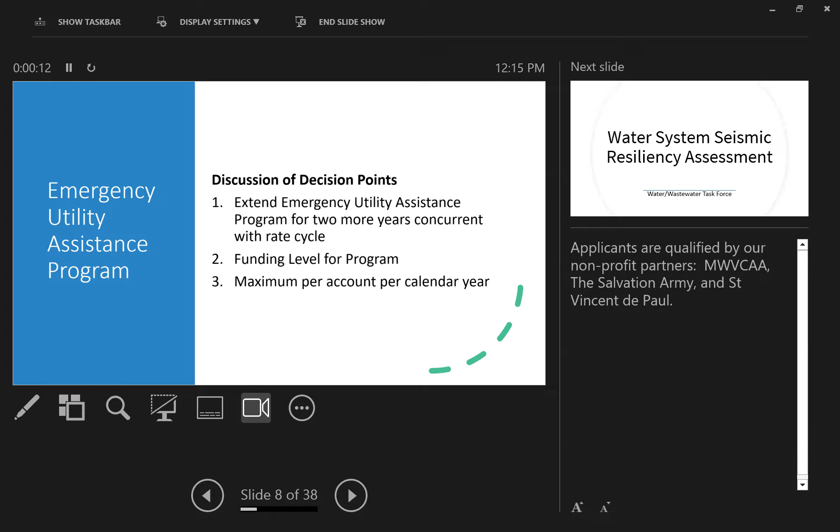So could you quickly summarize the revenues again for this? There's nothing except utility at this point. There's a small amount of federal revenue, a small amount of donation, less than $10,000 per year.

I'll note that there's a note on one of the slides that it's 1% of utility revenue. So when we increase and say our revenue slope is 3% or 4%, the difference between 3% and 4% is about $1.1 million. So when you're talking about subsidizing at $300,000, we're talking about a third of that.

So order of magnitude, and this may be something you want to sit with for a minute. I didn't want to push you to make a decision immediately. If we've got a lot of other things to get through, I thought we could circle back at the end if you want, if you're ready to talk about it more.

One thing Alicia and I talked about is there's the utility rate relief, which is applied monthly for people who are income challenged. Emergency relief was really meant for emergency situations, not something to rely on every year. So another thing we could look at is maybe we limit it to no more than 2 years, or one time every 3 years or something. It kind of feels like as usage has gone up, people are just depending on it and using it every year versus it being for an emergency situation.

How do you define an emergency? Is it a personal decision on the part of the applicant, or do they go to the Salvation Army or St. Vincent de Paul and say my husband wrecked into a truck before I came forward, and I can't pay my bill this month, and I need my water on? But it's not a program-defined emergency. Right, that's the intention.

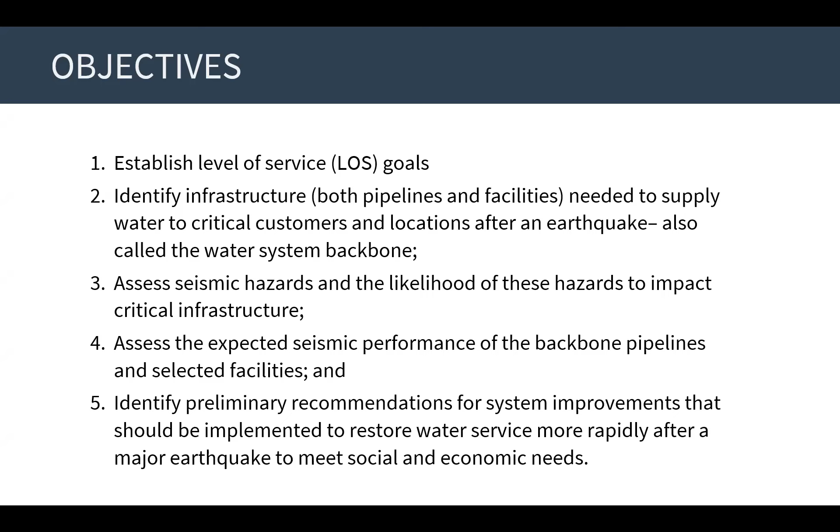But the good thing about that is, that's 0 to 1 days, right? So we're set up in a great environment at our treatment plant that it's pretty seismically resilient, just because of the geology around it, right? So we think that within a couple of days after the big one, we could actually start moving water again.

Should be able to have water. What's that? If you have water. If the dam, well, yeah, assuming the dam's still there, right? We're not gonna get into that today.

So we look at, can we get it out of the system? Can we get it out of the treatment plant? Can we get it through the system? And then how can we get it out to the community? And the good part of this is that everything here is in the short term, 2 to 4 weeks. We feel confident that we can be back up and running in 2 to 4 weeks, not fully functional, but getting to those critical places that we need to.

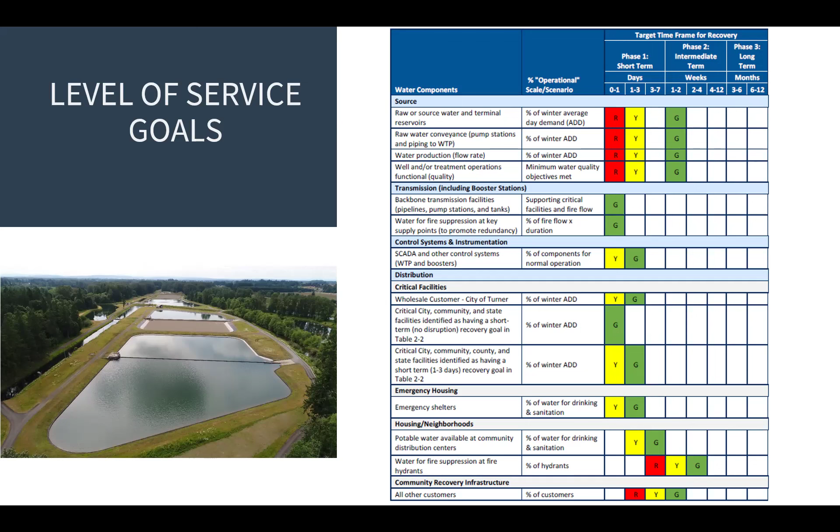Go ahead. We took all of our facilities, and there's a lot of them, and we ranked them as, what is the most critical, right? Highly critical, Geren Island water treatment facility. Turner Control in Turner, where all the water passes through.

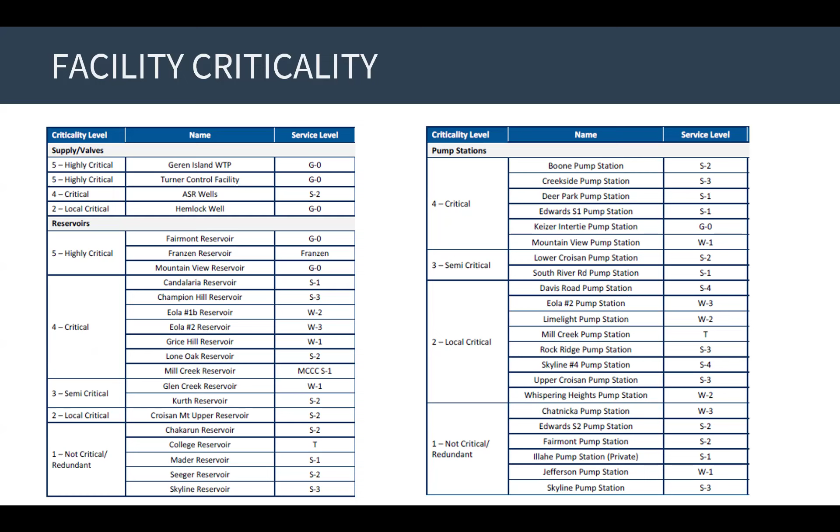And then we go down the list. Critical, this one, local critical is a term that we use for a small pump station that serves - if that pump station wasn't running, then that little neighborhood would be out of water, right? So that's what we call local critical. And we get all the way down to non-critical, and we do have some redundancy. So things like College Reservoir, Mader Reservoirs - if they were offline, they're not going to really cause us too many problems.

Can you describe the number of households served by those various reservoirs? Like when I see the one up on Croisan Mountain, it's not very big. That would be your local critical designation, meaning if that one is out of service, it will directly affect the residents in that area, but it doesn't harm the greater population.

When we say highly critical, we're talking about Fairmont, Mountain View, and West Salem, right out of downtown. Those are terminal reservoirs for us - that's where everything goes and gets distributed. But when you talk about those local pump stations or local reservoirs, like the one on Croisan Mountain, I'm sure there's several in West Salem too.

You've got to get water to them - that's part of the criticality. The ones like Croisan Mountain have to come through Fairmont. The ones up in West Salem, the higher ones, have to go through Mountain View. So if we establish that beachhead at those reservoirs, we can work to repair everything going up to those other reservoirs. Having those in place and intact after an earthquake will allow us the opportunity to move up into our service levels and get services restored.

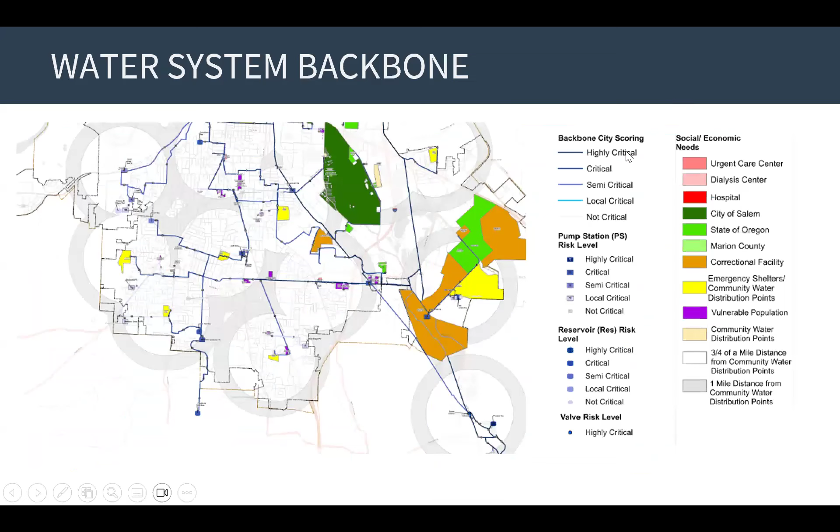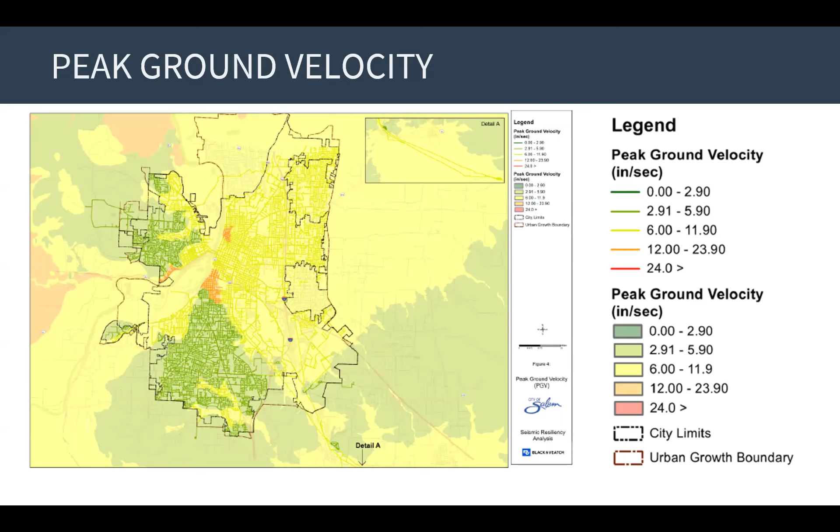These are just some of the analysis that we use - this is peak ground velocity, how much it shakes. The green is good, but that's still 2.9 inches per second. Hills in South Salem, West Salem are very stable. The downtown core and Northeast Salem are going to see a lot of ground shaking. If you go to the next one, you'll see the liquefaction as well - you shake soil enough, it becomes very unstable.

This is our transmission - so as old as this is, the good thing we have going for us is it's very stable ground.

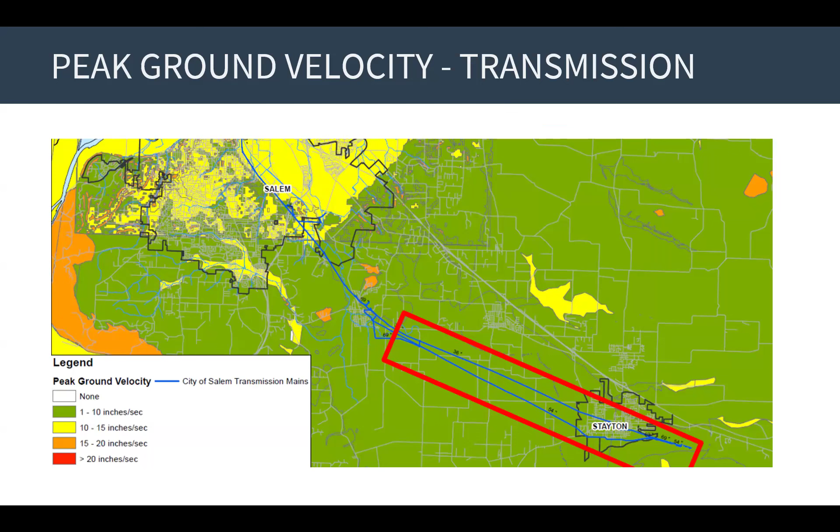This is farmland out toward Stayton. It's very stable, but that doesn't mean the pipe doesn't have problems. Go ahead, like liquefaction - this is our liquefaction map.

Is that where they're leaking right now the most? I know you're losing water from your system. We are, but we don't have that much of a leakage problem in our core. These pipes are old and need to be replaced, but our leakage rate is really mainly tied to our transmission system. We do a really good job of finding and repairing leaks within our system, but the transmission lines are very large, very long, so that's a much bigger task.

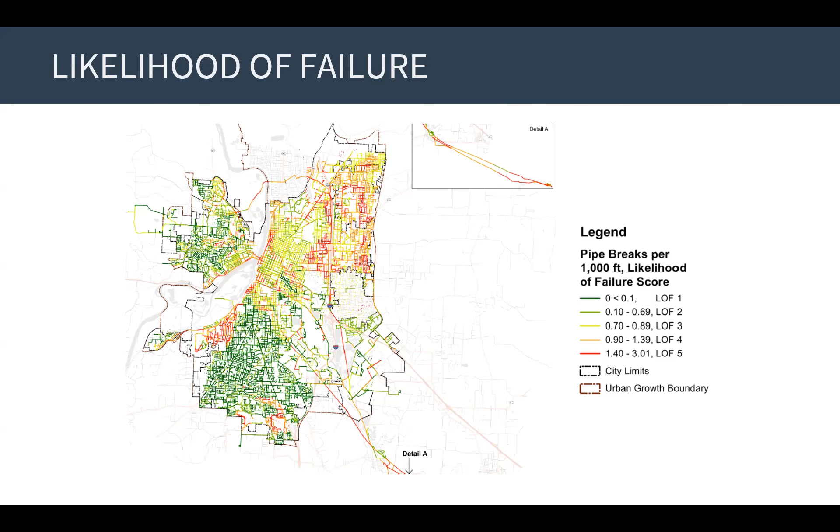So from that analysis - and I didn't take you through all of it, luckily - we developed a CIP list. What do we need to do in the short term? Short is 0 to 10 years. In the planning world, that's very short - I can tell Brian about a project, and if it gets built before I retire, I feel like that's an accomplishment. Medium is 10 to 25 years, and then longer term - what are we going to do for the long term?

So we looked at those critical facilities - what's the likelihood of failure, what's the risk if they fail? Number one, Fairmount, and Alan will touch on this later - that's our biggest need right now, besides our transmission lines. We have to shore up Fairmount Reservoir; it's a critical piece of infrastructure for the water system, everything drives off of Fairmount. Mountain View Reservoir in West Salem is the other most critical one - high need, we've got to take care of those two. The other ones - ASRs, pump stations, Turner Control - those are the things we really have to focus on in the very short term and make sure we're prepared for what comes next.

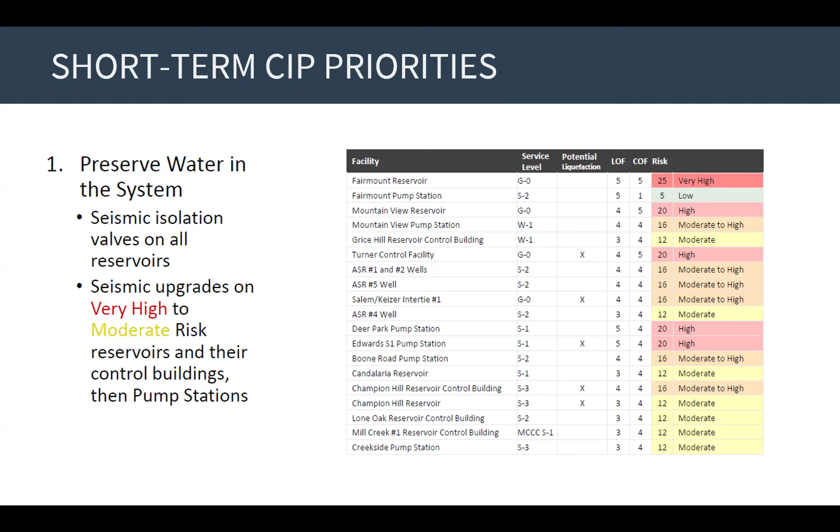Center Street Bridge project - you're probably all aware of that. We're working with ODOT to hopefully make that Center Street Bridge seismically resilient, and we're hanging a bigger pipeline underneath it to try to address some of these needs.

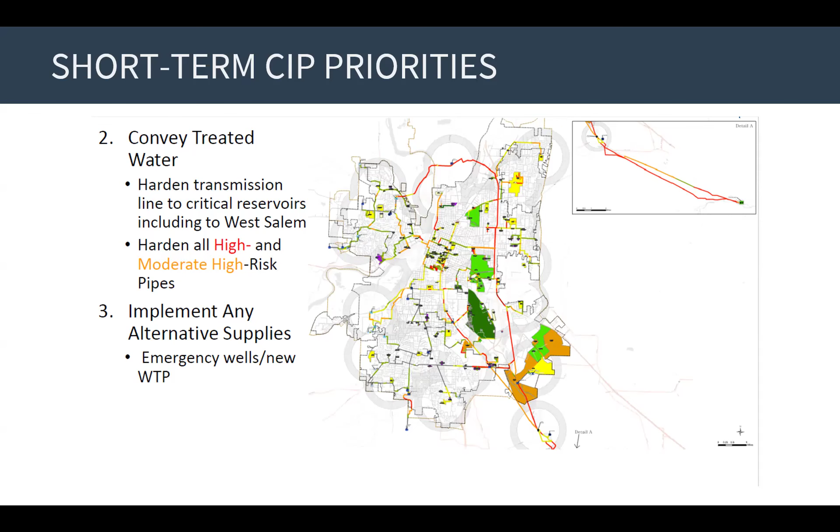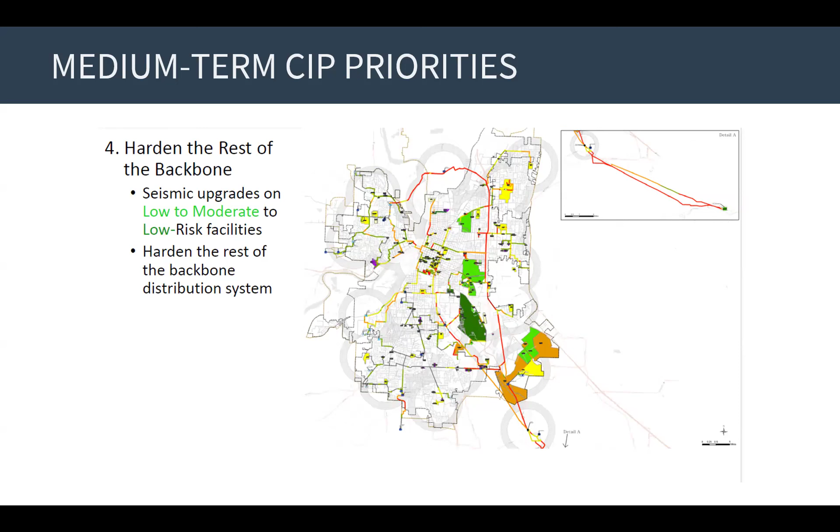Go ahead - low to moderate risk. Now we're talking about local critical small service area reservoirs that we can eventually do some things for. And then this is again the backbone - trying not to pay attention to the reds and yellows, the greens are the medium-term priorities that we're going to hopefully address in the near future.

And then that's the low risk. Low risk doesn't mean it's not going to fail - low risk here means they're not something we need to address because we're looking at our backbone. These are all in the core, the Northeast Salem area we've talked about - the ones we know are going to fail, but we have a contingency plan.

We know how to get water to these people, at least from a distribution point where they can rally to. But when we start talking about our repair and replacement program, our R&R program, you see a lot of these pipes, and we were working on these constantly. With the budget that we have, we're constantly replacing these pipes.

We know we have a critical issue in the downtown core. We have pipelines that are 100 years old that we are aware of. But again, when you look at it from a risk standpoint, how do we get water to people after a big earthquake event? That's why it's low risk.

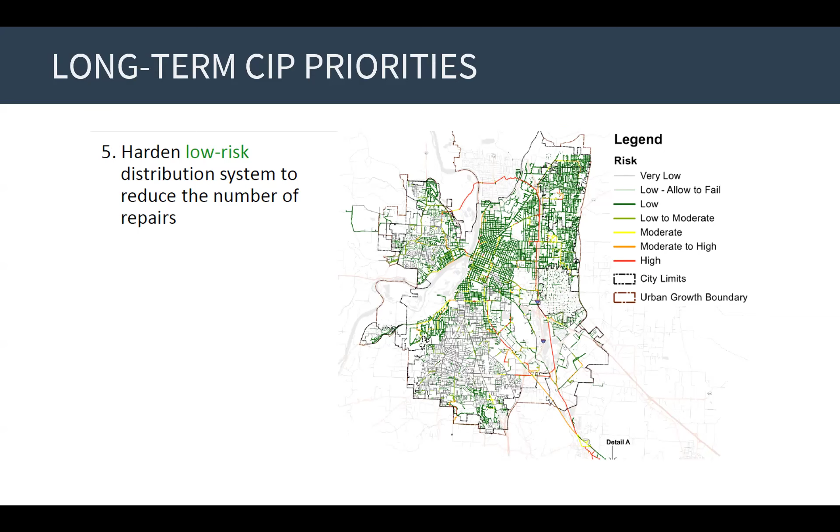They're going to fail, but it's low risk to the community at large. All right, so don't get too excited about this. This is a really low number, only $15 million. But this is based on these known issues.

So we had structural engineers go out to our facilities with their eyeballs only. We're not taking core samples, we're not checking rebar. They're just looking at things like roof joists - are things secured to the ground? Are things going to topple over when they start shaking? So this $15 million is not to be misconstrued.

I mean, this is like the things that we can easily go out and fix today. We haven't done any additional studies, right? So if you start going out to some of these reservoirs and doing in-depth structural analysis, you're going to find a lot more problems.

But what we know, what we can see with our eyes today, is $15 million. Go to the next one - $16.9 million. Again, if we had the money to just go out and start bolting things to the ground, shoring up some of the things that we know about, that's the number. But that doesn't even cover some really big needs - Fairmount Reservoir, it could cost that just to fix Fairmount.

So I always like to leave everybody gasping. Okay, so the next one, this is where we get good - $2.8 billion, there we go, to replace our pipelines.

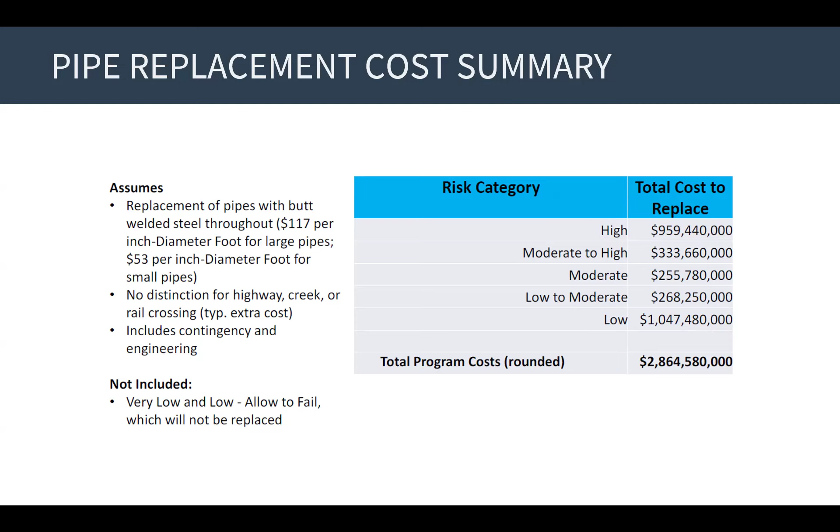That's all I have for you, unless you have any questions.

And I would just share, I think the good news on that smaller number is there are things we can go out and do for lower money that will help stabilize our system. And I think that's the key point - we've identified some really critical deficiencies in our system. And I know $15 million is a lot, but when you spread that out over 20 plus facilities, those are things that we can do right away.

So we're taking this list, we're plugging it into our ongoing CIP. Some of these are so small, they're operational projects - somebody going out and strapping some things against the wall or bolting down a transformer, things like that. There are some other ones that are a little more in depth, like reinforcing roof trusses and making sure those facilities are still standing at the end.

To what extent are those kind of eyeball estimates? What confidence do you have that they would actually provide a significant benefit, without the analysis?

So if we dove deeper into this, you would see we've ranked them on how fast - the level of occupancy, right? A lot of what we're trying to do for some of those critical facilities is making sure that we can get into the building, and that's the type of estimates we're looking at. It's not 'is the pump falling over', it's 'can you get in there and actually start working on repairing it'.

Yeah, so we did look at that. So we've got these wells. We looked at areas where you could possibly put emergency wells, and where it would be most stable and where it could supply water to that backbone.

I know Keizer has wells too. Yes, they do. Yeah, and we have an intertie with Keizer.

But we're looking at where could the city develop some emergency supplies. Our idea is not to pull these into our water system, it's like, can we put them in a school park? Use it for irrigation, but in the event of an earthquake and a distribution disruption, then that's a place you could rally to fill your water jugs up. So that is definitely something that we looked at and we have in our plans.

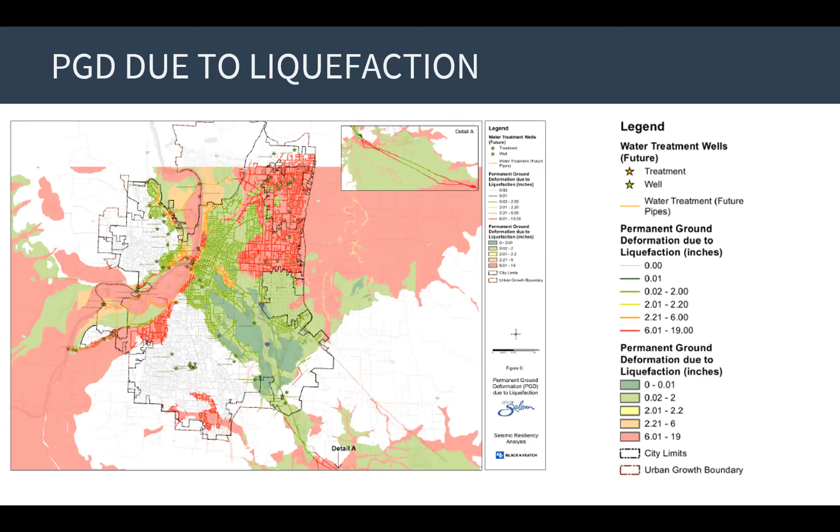I don't want to cut you short, but- I know, think we Alan's got to go. Yeah, Alan's got one more for future capital needs.

Seismic is just one issue that's facing our utilities, right? So thanks all for having me here today. Two objectives: one is just to give you a quick overview of what's in the 5-year capital improvement plan for our utilities, and then talk a little bit about what's not included in that plan as far as future needs, in addition to the wonderful news that Jason just brought.

Starting with the current capital improvement plan that was just approved last month, I've provided a summary of what's in it as far as utilities go. Every year we put together a 5-year programming summary of how we intend to budget funds for all city capital projects. The utilities make up about 40% of that total number. There are 64 utility projects in the document, amounting to just short of $200 million.

The funding sources are primarily utility rates, but we do get some system development charges to deal with those growth related expenses we were talking about earlier, and we apply for grants where we can. One good example of that is the Bennett Dam complex.

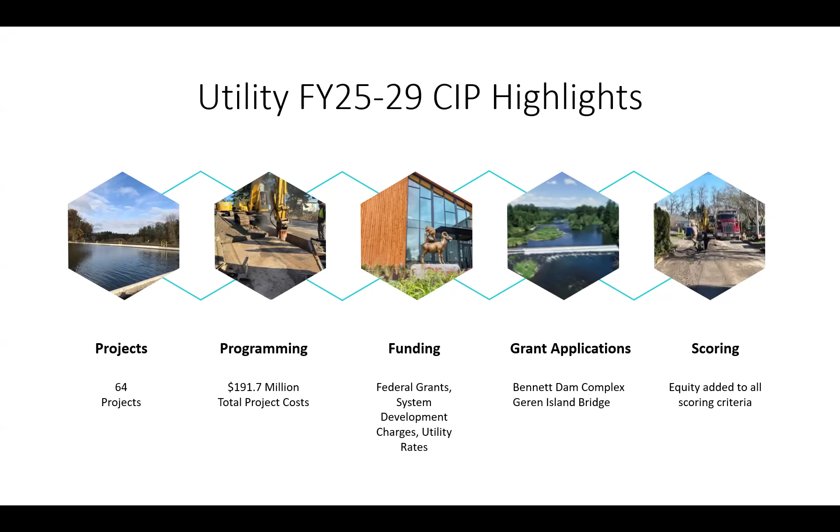So what I wanted to do is for each utility, just highlight a few things in terms of either important projects or just give you a flavor of the types of projects that are in the CIP. So starting with stormwater.

We have several culvert replacement projects in the program. We have a project in South Salem off of Mountain View Drive where we're trying to solve a flooding issue in that neighborhood. We actually purchased a property where we can create some flood storage there. It was a home that was continually being damaged with floods, so it made sense just to buy the home and create the long-term solution. That construction is starting this summer.

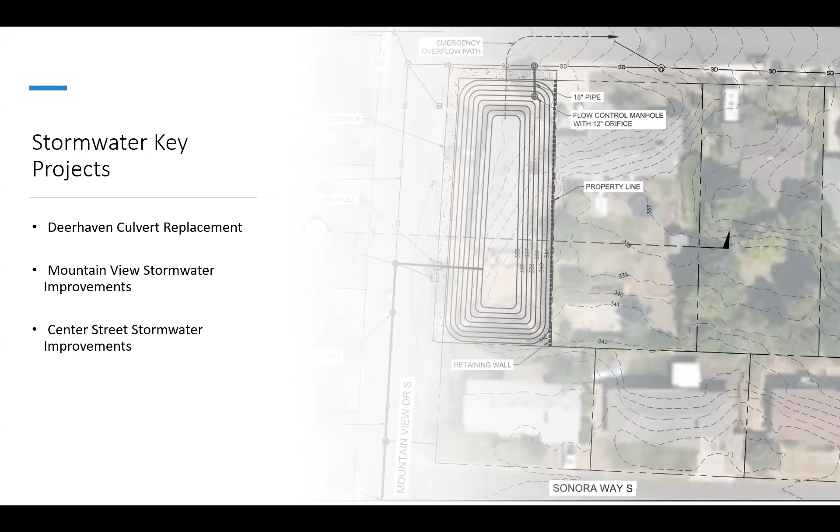Another example of the types of projects in all utilities: with the $300 million safety and livability bond that passed back in '22, we have a number of street projects where we're doing pavement work. We took a look at all the utilities under those streets to make sure to prioritize repairs that might be needed there, so we don't pave and then within a couple of years have to come back and tear up that brand new beautiful pavement. So Center Street is scheduled for pavement work in 2028, and we've got accompanying stormwater improvements to go with that. There are a number of those types of projects throughout the program in all three utilities.

Go ahead. Wastewater, there's kind of two pieces to the puzzle. Our Willow Lake Treatment Facility has a lot of aging infrastructure. We've been doing a lot of work out there, and there's lots more to do. So we've got a number of improvements continuing through the 5-year program at Willow Lake, including work on the clarifiers and digesters, both part of the treatment process out there.

Orland Road is another utility avoidance project for the bond program. The city has a construction and demolition landfill at the airport that we're not using anymore—that's where we used to empty vactor trucks and things like that in the old days—and we need to close that per DEQ requirements. So that's a responsibility the utility has to take care of.

Another issue you hear talked about with our sewer or wastewater system is overflows during heavy rain events. Because of the age of our pipes, just like our water system, they're leaky. With big rain events, we see huge surges in the system heading toward the treatment plant, and sometimes it's so much that we have overflow. That's what SSO means on that last project—sanitary sewer overflow. So we have projects identified to find areas with constrictions or big inflow sources and try to reduce those to prevent it from happening.

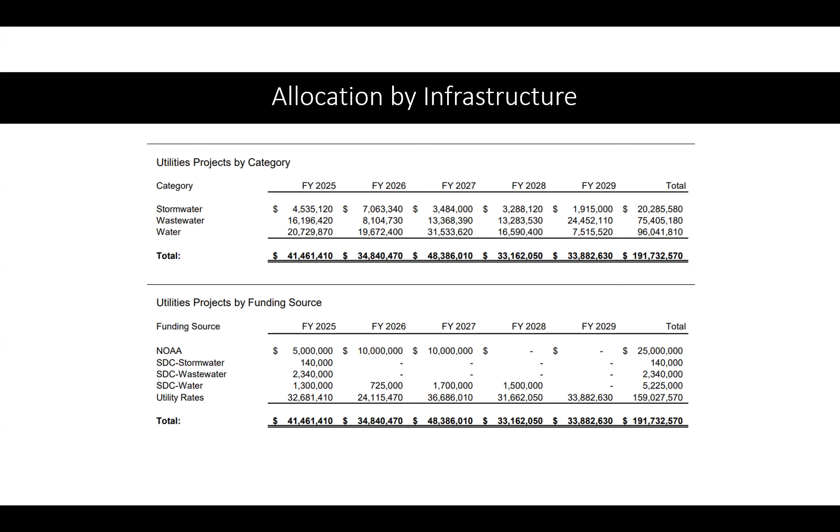So that's kind of a quick overview of what's in the CIP. But what's not in there is there's lots more. I'm sure one of the questions in your mind would be, well, how much does all this stuff cost? And the answer is it depends, because you got to look into it more.

We're talking about hundreds of millions of dollars in needs here, just in this next bullet. So we talked about Franzen Reservoir, that's our main storage before water comes to town. Between Stayton and Turner, where Franzen is, that's our main storage before it gets distributed to town. It has a floating cover that's over 20 years old and nearing the end of its useful life, so we know there's a replacement coming there. We think that's probably about $25 million minimum.

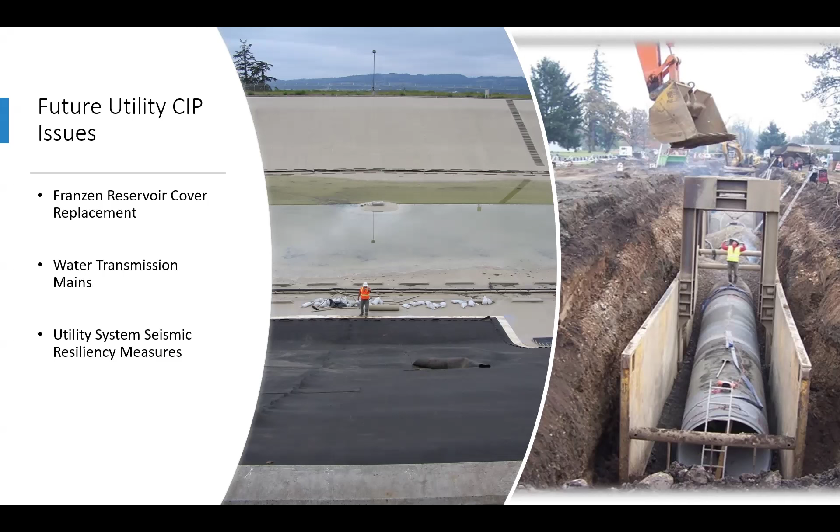We talked about the transmission mains. Those pipes were built in the 30s and the 50s, and there's multiple miles of them. So we know that's an issue that needs to get worked on, especially for seismic resiliency. And then all the other things Jason talked about, Fairmount Reservoir is the only one of those things on that list that's currently in the CIP, right?

We also talked about rehabilitation and replacement, so pipeline work, both water and wastewater and stormwater, all three. Right now in the program, we have anywhere from $500,000 to $1.5 million per year for each one of those utilities to go out and do pipe repairs or replacements where it's needed. We could easily be doing 10 or 20 times that amount if we have the money and the resources to deliver it. So that's where the needs are. Some of the work we're doing with our asset management, CityWorks implementation, will help us really refine the reporting on the conditions of our pipe and what's needed.

But we know it's many millions more than what we're funding right now. On the wastewater side, all of West Salem depends on a pump station that collects everything that comes from West Salem and then pumps it under the Willamette to Willow Lake. That infrastructure is aging and needs work as well. And then thinking about Willow Lake some more, we know there's requirements coming both for temperature, total maximum daily load in the Willamette, and an update of their permit to discharge to the Willamette. So there's going to be additional ratcheting down of what we're allowed to discharge. That's going to likely result in costs for us at the treatment plant that we don't have a number for right now, but we know what we need.

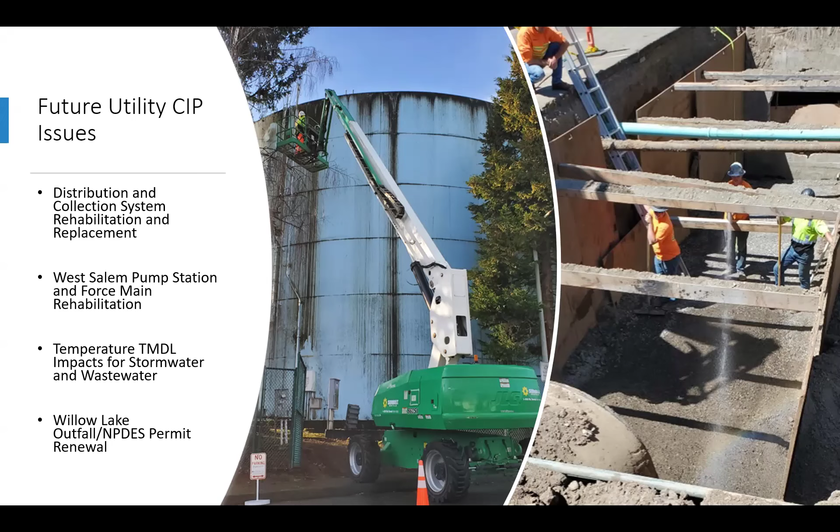Those are the main things I wanted to share. There's probably more, but these are some of the big ticket items that we're tracking that we know we'll have to define and start working into the CIP in the near future.

What do you anticipate the time frame on the TMDL limits? I think it's probably in the next few years, it's kind of pushed out. Yeah, I know they've been kind of dragging. Yes, just an update on that. I want to call out that this morning the Rules Advisory Committee had their meeting this month, and we expect the TMDL to be released probably in the near future. Is that still for comment though, or is it final? That'll be for comment, but it'll be their final version. So we are monitoring that very closely, because as proposed right now, it's causing us issues around the first year, and that'll only get worse, with implications for the stormwater utilities.

Yes, I have a question. So the wastewater in West Salem gets pumped over to Willow Lake to then get treated and then back into the Willamette River. I'm not sure if there would be cost efficiency to build a smaller water treatment plant on the west side so that you didn't need to pump it and then have it go through. I have no idea, just curious.

We haven't done a detailed analysis of that. My gut tells me that the capital expense might be okay, but where it kind of gets you is then you have multiple facilities that you have to operate, maintain, staff, and everything else. So it hits you on the O&M side. I think if you did the math and said, okay, what does it cost to upgrade our pump station and our force main, and then look at how that factors out over the life cycle, I think you can. Those numbers are in the 20 to 30 million range, which is a lot, but over time that might be offset by the staff that would be required at another separate treatment plant and all the issues that go with that. Thank you.